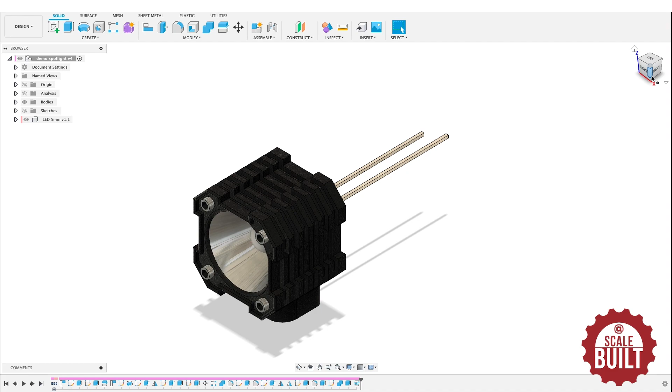Okay, so just to follow up from the last tutorial, maybe you could possibly want to, instead of having a single spotlight, make your single spotlight into a light bar. So let's have a look at that.

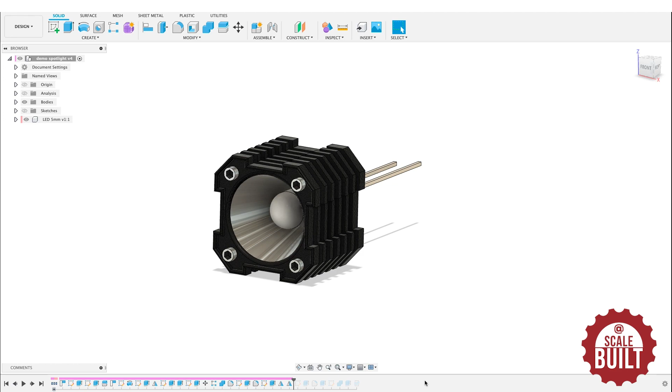What we need to do is roll the history marker back to a position before we created this little plinth at the bottom. So I think that was about there. Yeah, so I've rolled the history back to there, and now we're just working with the one body without the plinth. So get rid of the LED, we don't need that for now.

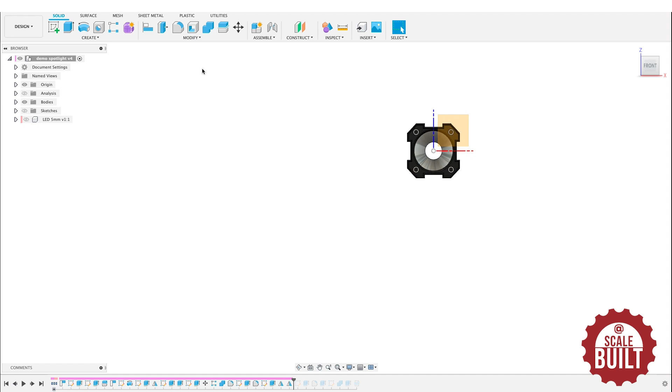Let's put the origin back on because that helps. So what we want to do is make more of these spotlights in a line. Okay, so we're going to make a pattern of this single spotlight to make it into a light bar.

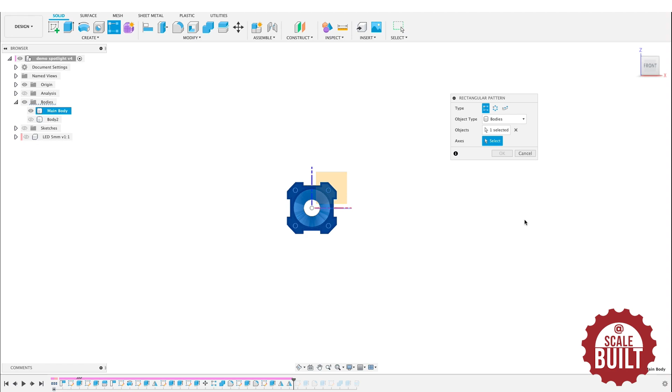So if we do create, pattern, rectangular pattern, it's a pattern of bodies. The body we're going to do is that one. Axis, there - it's basically which direction do you want to do them in. We're going to do it symmetric, so it's going to put them on either side. And we're going to start with 9 of them.

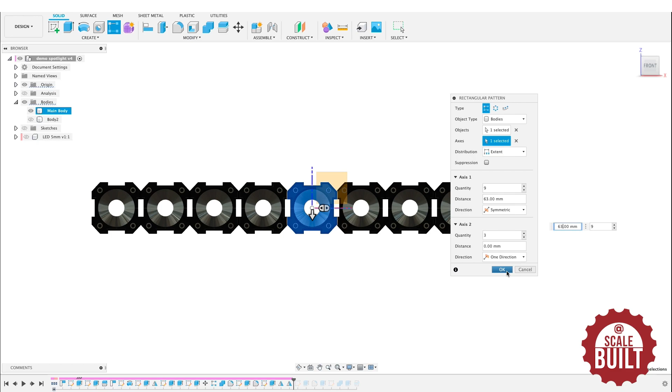And you can drag out. This is a bit of trial and error to see how far apart we want them. There you go, they're just overlapping slightly, and we'll press OK. So you've got that. So in theory, that could be printed as one item now on a resin printer.

But what we could do to make it a bit stronger is put like a solid bar that goes all the way through the middle. So let's do that. But you can see here that we've now got all these 9 different bodies. So we can now combine those into one. So if we do modify, combine, target body is that one, the tool bodies are all the others.

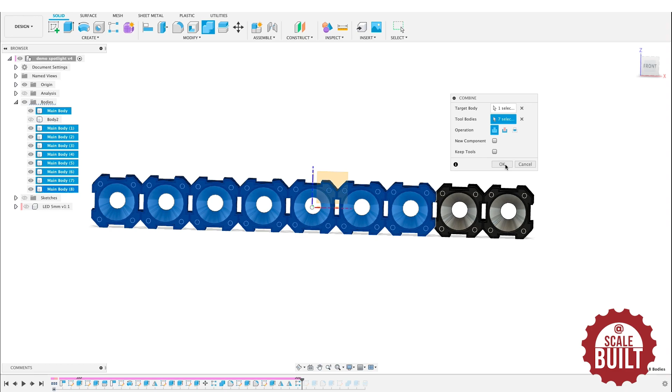Press OK. So now we've just got the one body that's all of them stuck together. And then what will I do? I will do a sketch on the back,

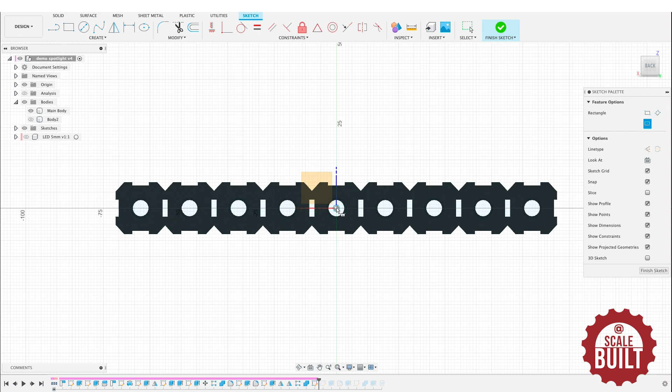do a rectangle, starts in the middle, goes like that. Finish the sketch, make it visible. So we're going to extrude this solid rectangle to be the bar that attaches all the individual lights together.

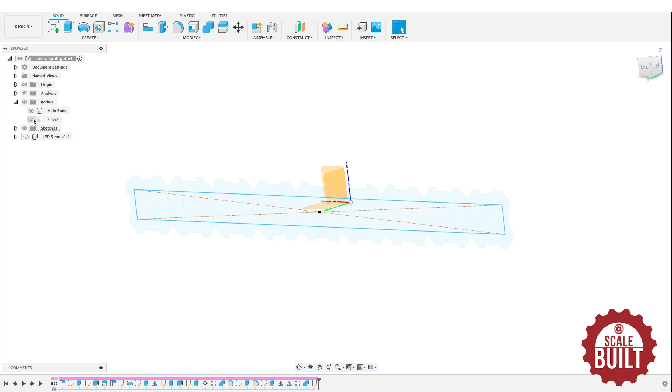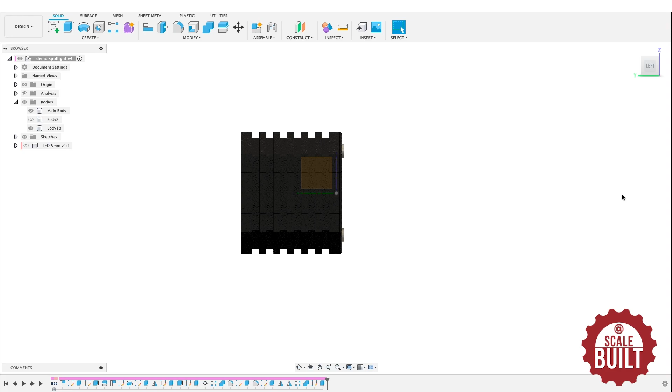Just do extrude, select it. So if we do it maybe 9mm in, make it a new body. Okay, so you've got this bar that's going to attach everything together, but obviously it goes through the light buckets, so that's no good.

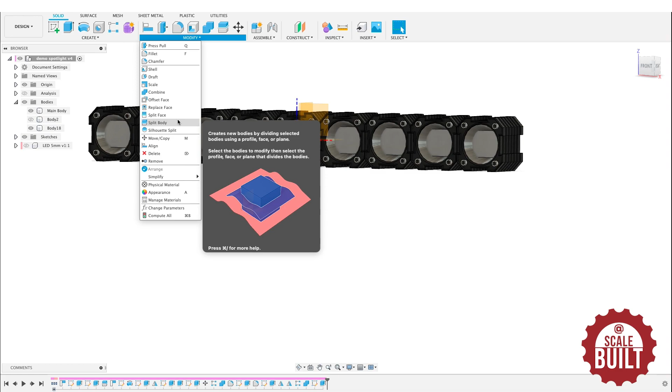So what you have to do is sort of cut out all these little intersecting bits. So the easiest way to do it is to do modify, split body. The body we're going to split is the bar, and the tool to do the splitting is going to be the light bar. Hit OK, it'll just take a minute to work it all out.

And what you'll find is that we end up with loads of extra bodies now down here. So what we've got to do is remove the bodies that we don't want. So if you hover your mouse over bodies, you'll see that they highlight, so we don't want that one. Don't want that one. Don't want that one, don't want that one, and so on and so on.

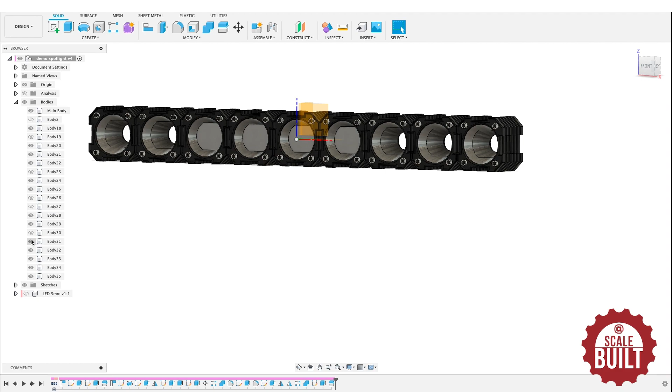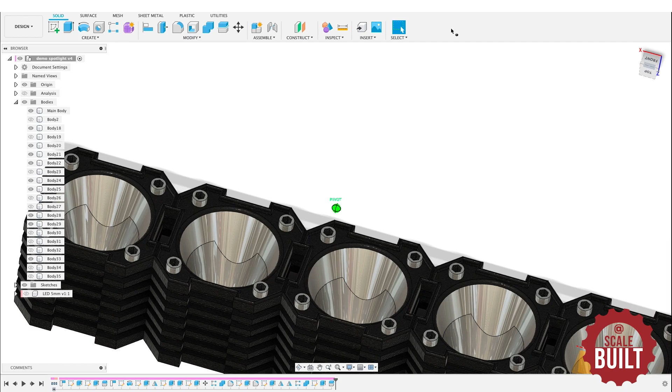You leave the ones that are in between. Like that. So you can see now that there is a solid bar that is connecting them all. However, you've still got the holes for the LEDs to poke through. You've still got the full light buckets. You can see like the seams where the extra bodies meet.

And now once again we can combine all those bodies into one. So what we can do is combine all these random bodies into one. So modify, combine, target body is the main one, the tool bodies are all the other visible ones. We've got it set to join. We don't want to keep the tools this time.

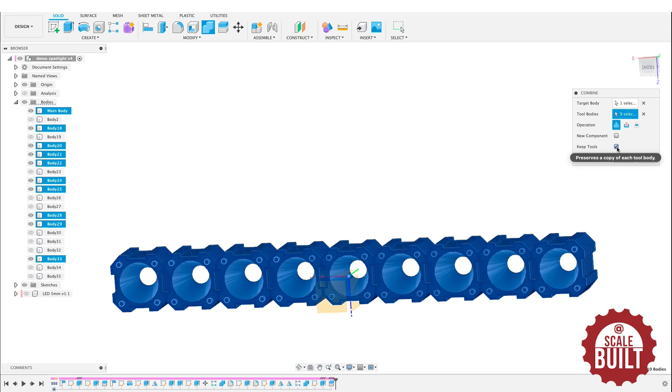Okay, so now all of that is just one body, and all these spare ones, if you highlight them, right click, don't press delete, press remove. If you do remove, you end up with all these little markers added down in your timeline. So that means they're not there, but if you ever want to get them back, you can reverse that action using these status points.

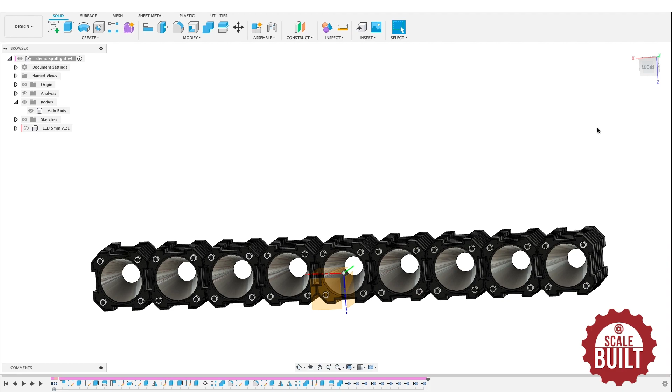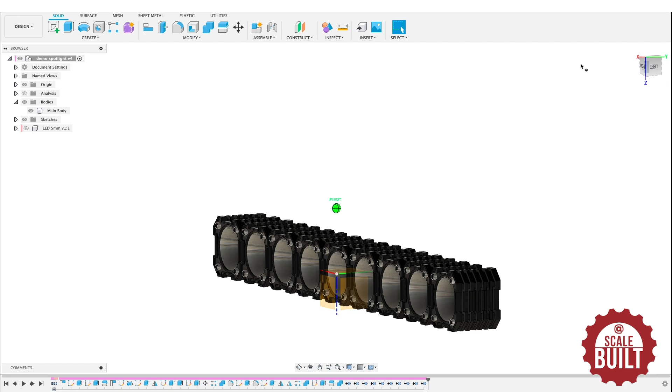So there you've got all that as a one unit that you could, in theory, 3D print on a resin printer or on a regular 3D printer, but the quality wouldn't be anywhere near as good. And then you're going to need some way of attaching them on the ends. So you could screw it into, you know, some brackets that you had on a cage or something like that.

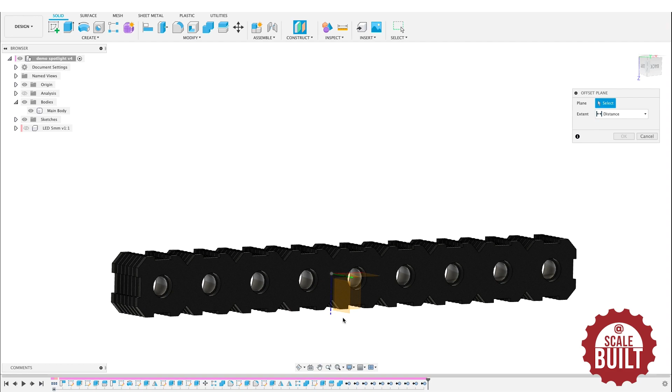So what I'm going to do is make a little boss on the end that I could put a hole that can be tapped. So if we do an offset plane of this one, I'll put it over here.

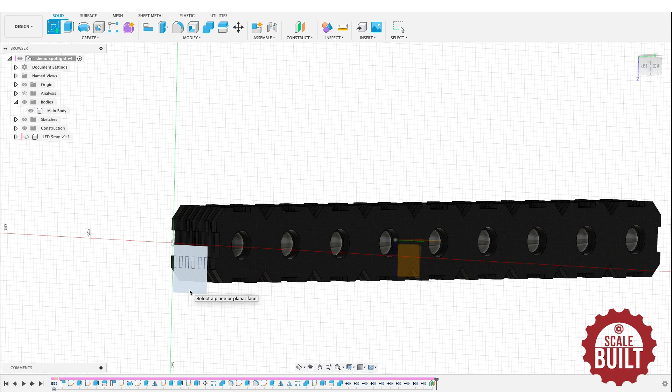Okay, I've now got a surface, a flat surface that I can draw on. Do a sketch on that plane. Then let's do a circle, on the midpoint, ending up with a 10mm circle. Press Q.

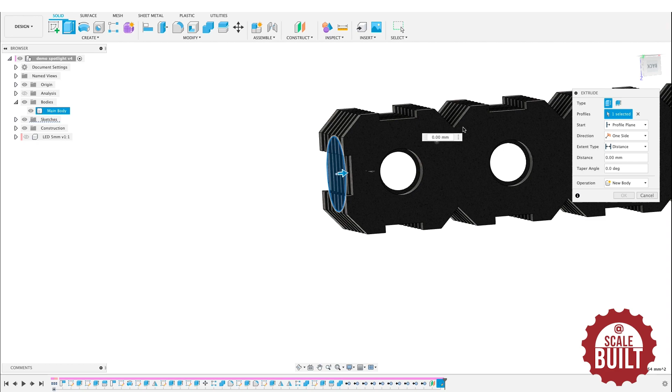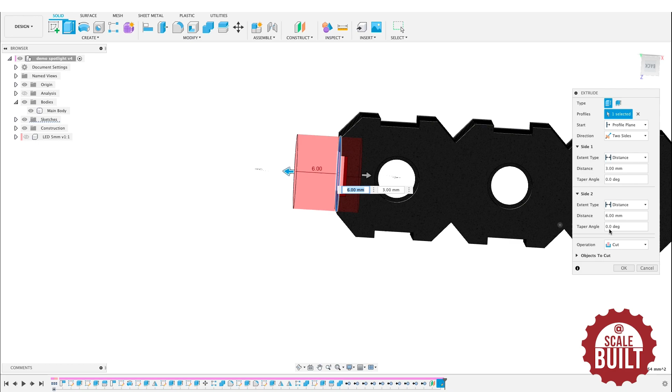I'm going to extrude it in a little to cover up all the little cutouts that we've made for the ribs, and then we can set that to 2 sides and extrude it out a bit, set it to new body. You can see how that's going to look like that.

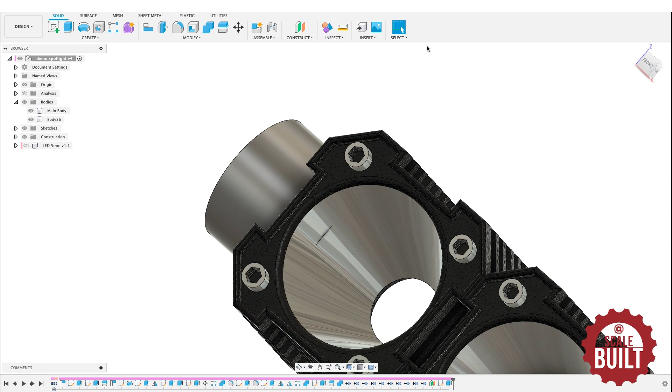Okay, you can also see that it's just impinging there on the reflector bowl of the light. So what we can do again is we can sort of cut that bit out. So if we go modify, split body, this body, the splitting tool is going to be this face. Do that.

Okay, it now turns into 2 separate bodies. You've got the outer bit and you've got the bit that was just poking through. So I'll hide that for now.

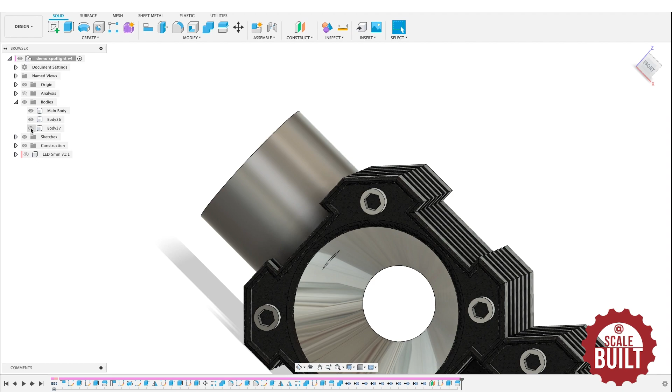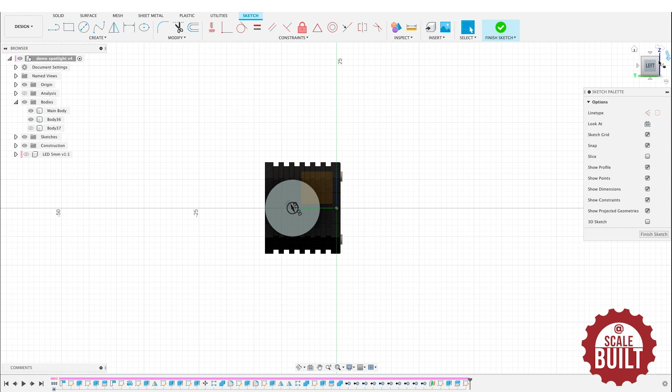You could make this any shape you want, rectangular or anything. And do a new sketch on there. Let's just make another circle, just put it as 2mm. Let's hide the lamp.

No, what we need to do first is combine these bodies so that when I put the hole that gets tapped in, it is actually getting tapped into the bucket as well. So what I need to do first is...

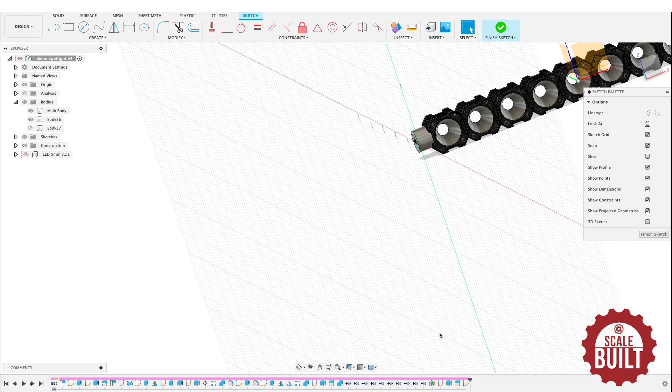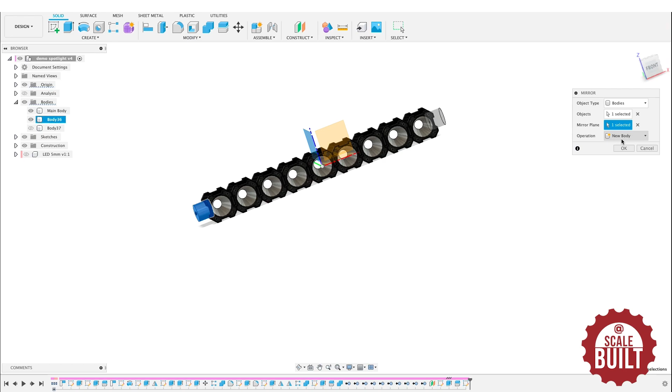If I create a mirror of this piece over here, so there's one on either end - create mirror of a body, the body is this, mirror plane is that, you get another one over the other side. Because we already did the split body, getting rid of the bit that poked through, it doesn't poke through over here.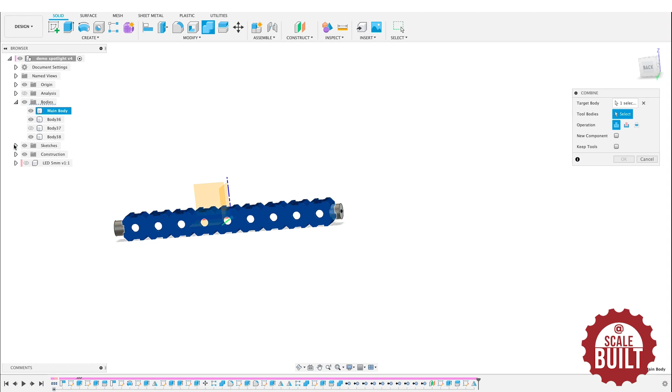We've got those there. Then we need to do modify, combine, target body is the main body, tool bodies are the two bosses that we've made, set to join, okay.

Then I can do my extrude for the hole. If we can see just visibly how far we want it to go - if you went all the way through, it'd poke through into the light bucket, so we don't want that. Let's go in 9mm and it's set to cut.

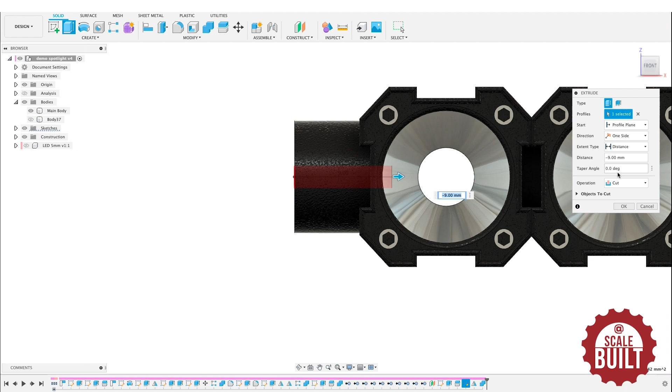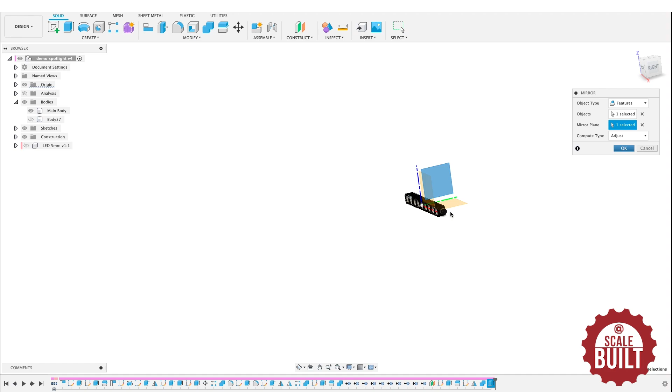Then we can do a mirror of that cut. So we're going to mirror a feature, the feature is the cut, and we're going to mirror it in that plane, okay. So now you end up with the hole there as well.

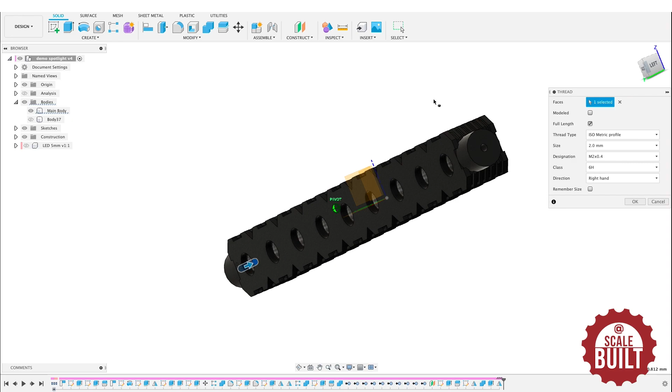And then we need to add some threads, so create a thread, the face is there. Does it let you do two? I can't remember. No, you can just do one at a time. And let's have a 3mm - I want it modelled so I can print the thread. Okay.

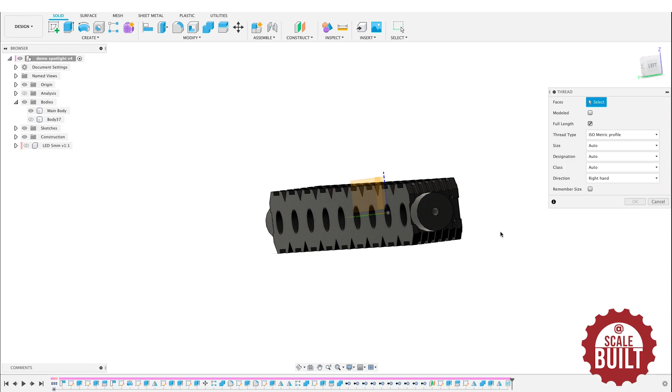Then repeat it. Create a thread on that face, 3mm, modelled, okay, and there you have it.

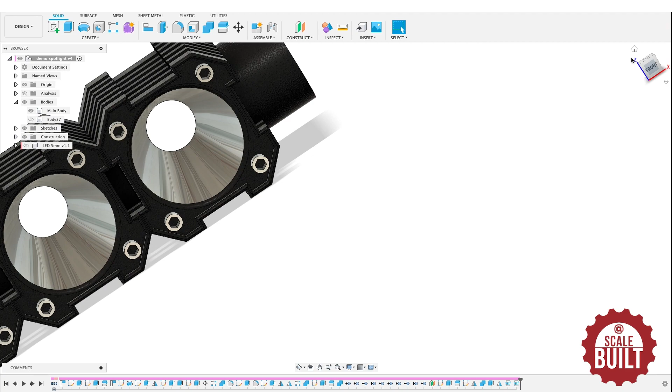So that is one body, that you could export as an STL, 3D print it, resin printer, upload it to Shapeways, whatever. Obviously if you've got a specific application for it, you'd be a bit more careful than I was about working out what overall width you'd end up with here from here to here, so it'd fit in between your brackets.

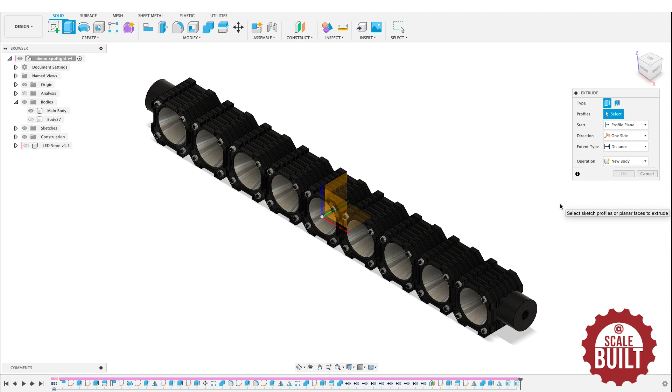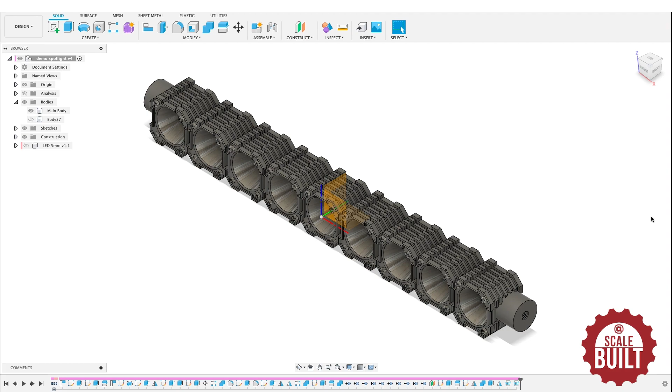Let's just change the appearance of it. Let's make it something grey. Oops. It's a bit easier for you to see. And there you have it.

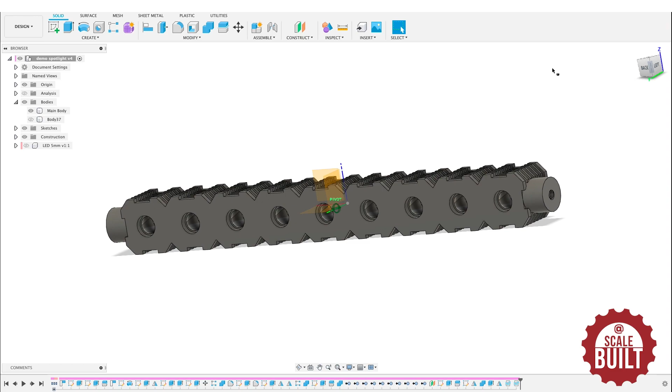So you'd be able to mount it with some M3 screws into there. You'd have to put 1, 2, 3, 4, 5, 6, 7, 8, 9 5mm LEDs in there, and then wire them up however you're going to wire them up, and work out what resistors you'd need. Prime it, chrome paint the buckets.